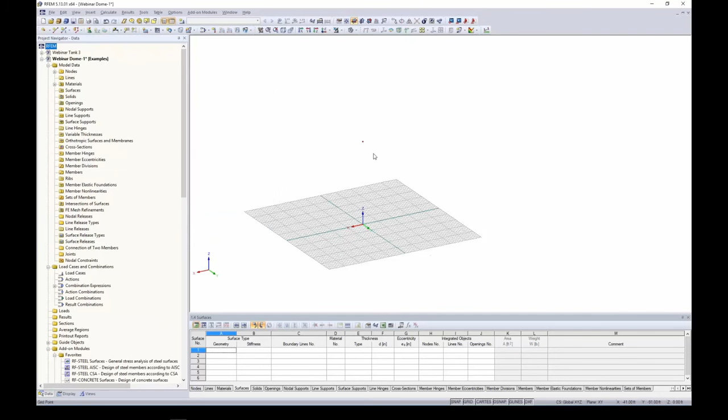So I'm going to move on to a line element. Now a line element is exactly what you would think it'd be, something similar to what you would use in AutoCAD. In addition to a straight line, we have many other features here that are similar to AutoCAD, such as circles, ellipses, polylines, arcs. For today we're going to utilize this option in arc where we define our radius.

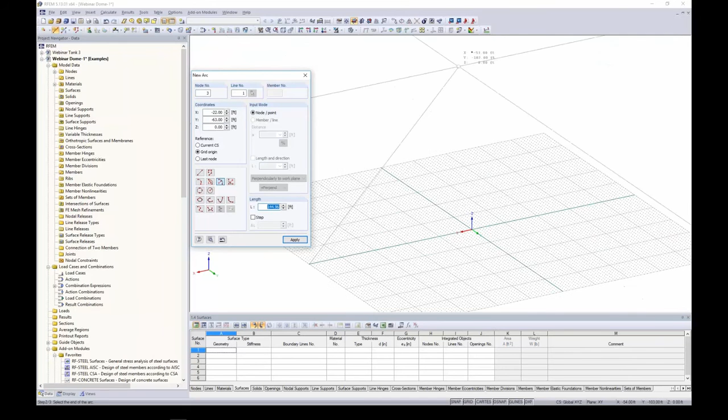So with this, I'm going to zoom in here, and I'm going to click on my first point 50 feet away from the origin and snap to that second node that we just created. So now you can see here that I can go ahead and either snap to a point to define the radius of my arc, or just type in 50 feet, hit enter, and now we have that arc element created.

I'm going to select this arc, and I'm going to use my rotate copy tool. I'm going to create 4 copies here with an angle of 90 degrees. Now we're going to rotate it about the origin, nothing too special here. But there is a setting called Edit Expanded Settings, and we have the option within this dialog box to actually create surfaces between my copy nodes. So what happens with this checked? Well, once I click OK through all of these dialog boxes, you'll notice that my dome roof was created with just a few clicks of a button.

So the dome roof right now is bright red. That usually tells you that there's something that hasn't been defined within the model. So when I highlight all of my surface elements, I double click to edit them. We want to set the material, the thickness, and the stiffness here. Right now everything's set to null. So we're going to change this to standard. We're going to utilize one of the default materials within the program, so concrete 4000 PSI. Now you can always access your material library here to change the material or to create one yourself. The thickness of our dome walls will be 8 inches, and I click OK.

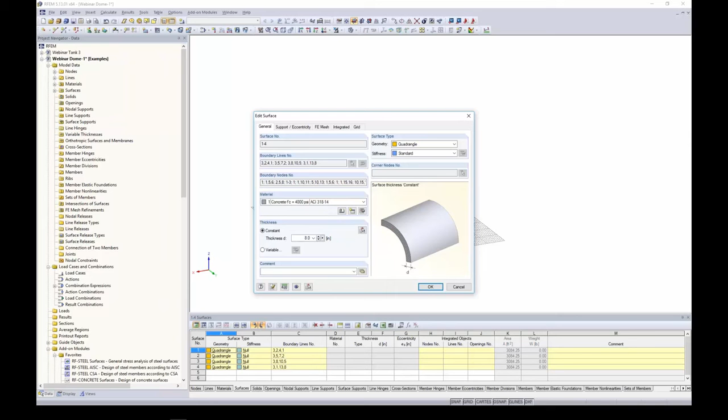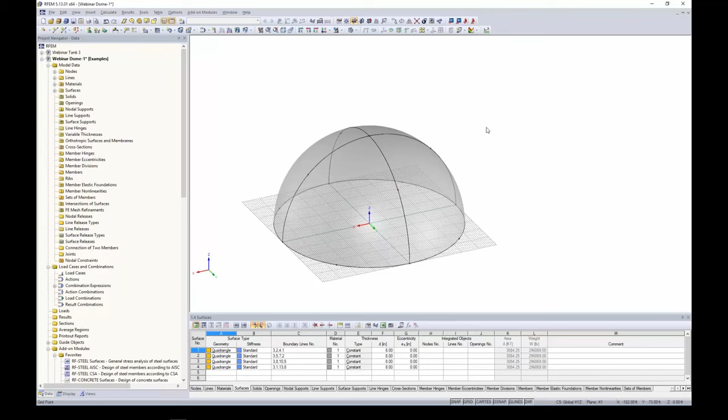So once I click out of here, you'll notice that the color is now gray, which is representative of our concrete material. So perhaps a weak point of a dome would be up here at the top, and we would want to add in some type of rib members for additional stiffness up at the top center point here. So I want to show you some of the useful features and tools that we have within RFEM to quickly do this. Now I'm going to turn this into a wireframe view, turn off my grid down at the bottom, and my line elements up at the top, I'm going to use my selection box here.

I'm going to right click to edit the line. And under this option, we have Create Node on Line at a certain distance. So with this option, I can create a node on that line 10 feet from the line end. And you'll notice these black arrows within RFEM show me exactly where the line start and the line end is. I click OK, so now I've done nothing more but just create little nodes here at the top of the dome. Now we're going to do the same thing at the bottom lines. I'm going to highlight all of these lines down at the bottom. Right click, and under line we can create a node on the line at a certain distance, again 10 feet from the line end.

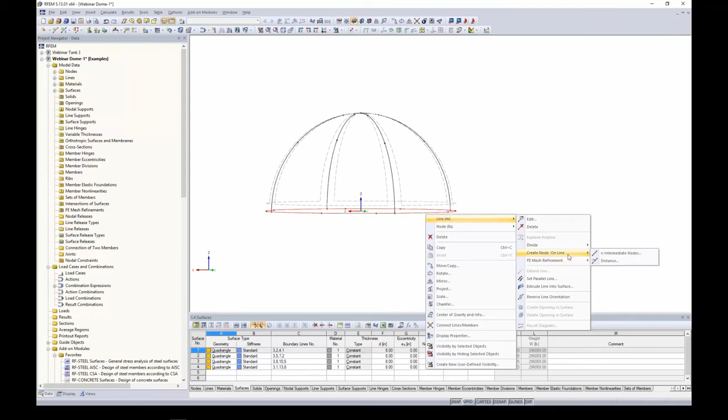I do the same process again. This time I'm going to create the node on the line 10 feet from the line start. Okay, so all I've done here is add in these additional nodes to my structure.

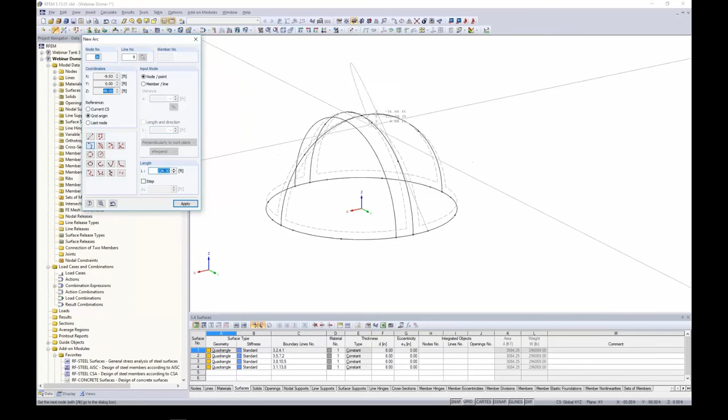Now I'm going to utilize the line element again. This time with my arc, I'm going to choose the option to define the arc with 3 nodes. Once I select this option, I can move this dialog box over and snap to these nodes that I just generated. Now you'll notice that I'm getting arc elements that match the curvature of my dome roof perfectly. There aren't any additional definitions that I need to define here in terms of the geometry, but the program will automatically do it for us.

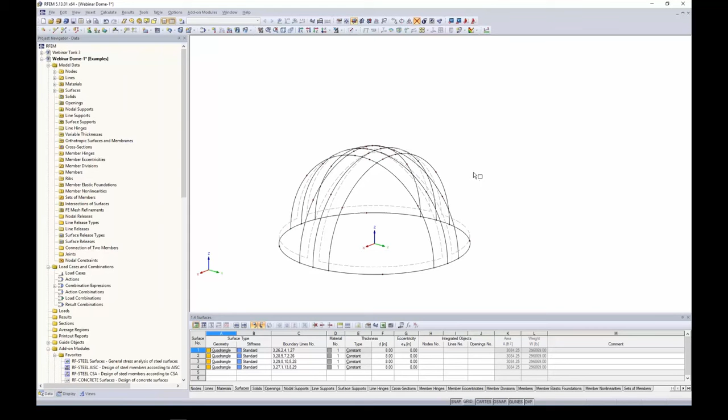Once I have done that, I am going to use this tool up here at the top, Connect Lines or Members. What this allows me to do is highlight the top of my structure here, and now all lines that are intersecting will be divided. You'll notice that an additional node was created here at these intersections, so these are now separate line elements.

I'm going to select 2 of the arcs over here, 2 on the back side, and right click to reverse the line orientation. Now you'll notice when I select the other 4 arc lines that all 4 of these lines begin at the bottom of my dome structure and end at the top.

With this option, I'm going to right click and divide the line this time by a certain distance. So from the line end, I'm going to divide it at 10 feet. I click enter, and now you'll notice I have a couple smaller line segments here.

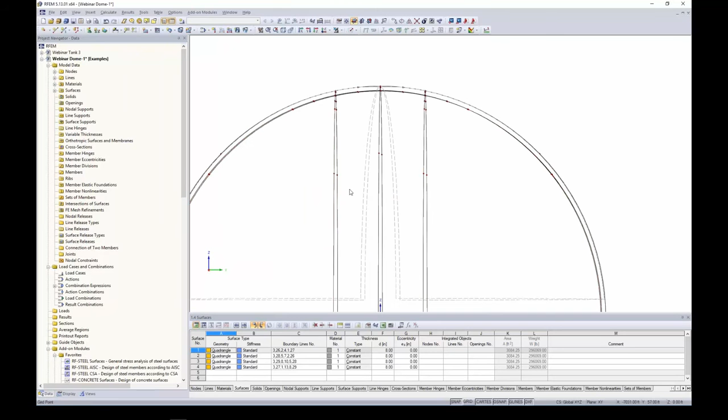Well, now we're ready to clean up the model a bit. So what I can do is turn this into elevation view, highlight some of these unnecessary lines, and simply hit delete on my keyboard. We're going to do so on the other side after I've rotated the structure around. Now you can see we have these what will be rib members, but right now they're only lines.

Now, before assigning a cross-section to these lines, what I need to do is integrate these lines into each surface. When I take a look at the rendered view, typically RFEM will do a lot of this for us automatically, but this geometry is a little bit more complex, and we added these lines in after the fact.

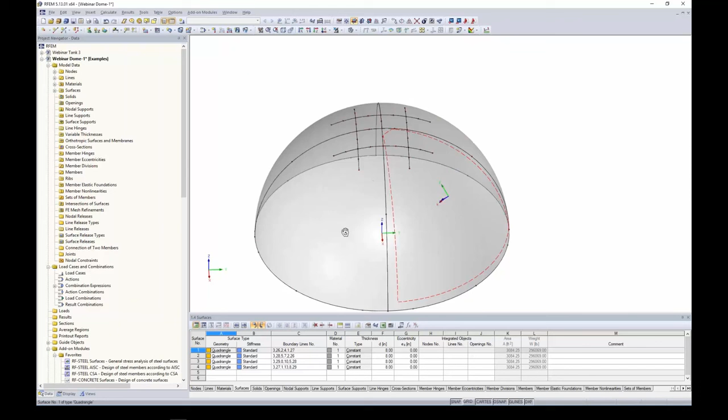So what I can do is double-click on this surface, and we have a nice tab here called Integrated. With Integrated, I can graphically select the lines, move this dialog box here, that I would like to integrate into that particular surface. I click OK, and then rotate around to do the same thing for my second surface, select my 4 lines graphically, click OK. We're going to do the same thing for the third surface, selecting the 4 lines, and lastly we have our 4th surface to consider. Once we fully integrate these lines in here, the surface will recognize that these lines are fully part of this particular 2D element, and I click OK.

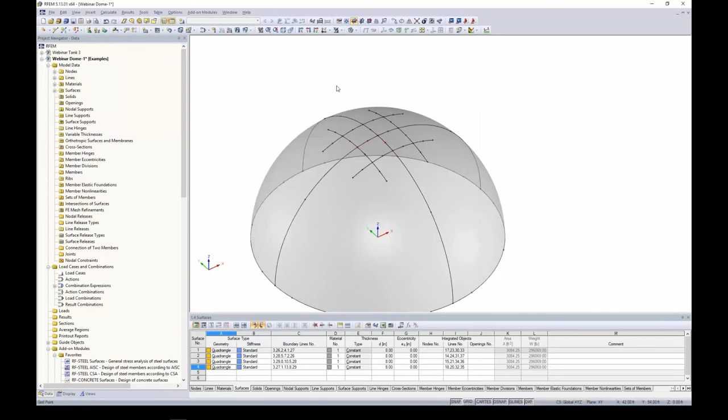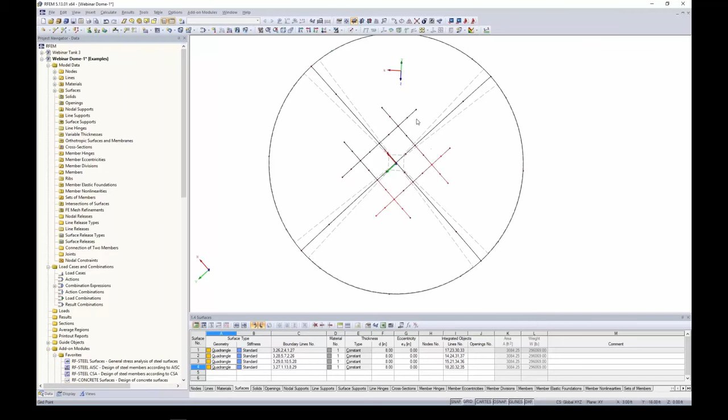So turning this back into wireframe view, I'm going to zoom out and put this into plan view. I'm going to hold down my control key and select all of these line elements here. I'm going to go ahead and click on - oops, sorry, I lost that selection. Let's try that again. So I'm going to select these 4 line elements on each surface that we just integrated, and I'm going to right click on these lines to edit them.

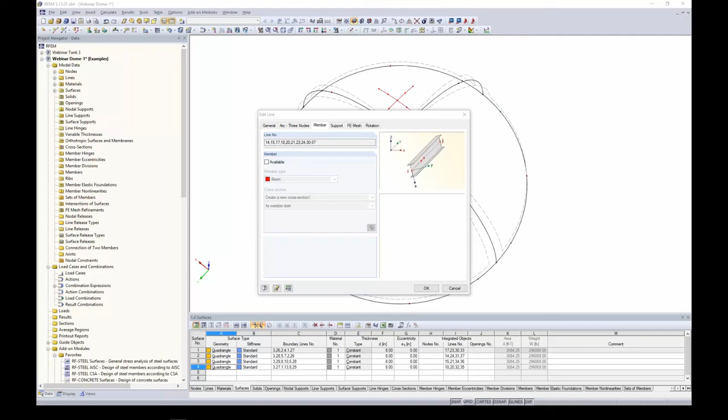Now each member, such as a column, a beam, anything else, is comprised of a line element underneath it. All that we've done is assigned a cross section to create that member for each line. So we have a member tab here. With this member tab, we can simply select that a cross section is available, and automatically a new member dialog box will pop up. Now the member type is going to be the type rib. So what is so special about a rib element?

Well, if I go into the detail settings here, you'll notice that a rib element can actually be placed below the surface. So the program will automatically determine which rib element should be dropped down below the thickness of that surface and do everything automatically.

We can define an effective width for the rib member on either the left or the right side. That will be taken into account later if we want to do reinforcement design for this rib in one of our add-on modules.

I click OK, and I need to assign a cross-section. For this, I go into my cross-section library. We're focusing on concrete today, so here are all of my parametric massive sections. We'll utilize this rectangle, and I simply type in my geometric properties of 10 inches by 18 inches. F'c of 4000 is great, we'll stick with that.

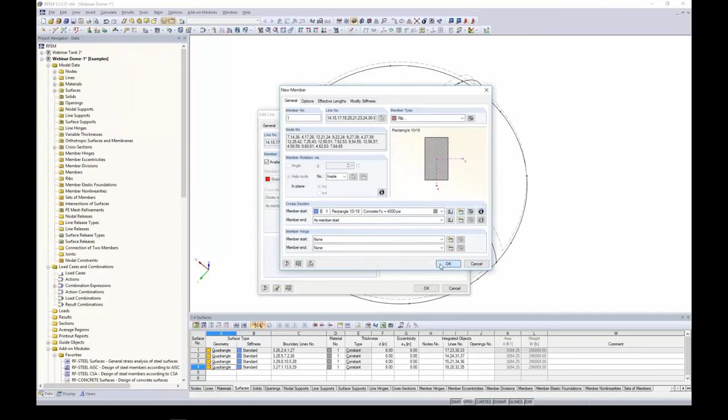In wireframe view, it doesn't look like anything happens, but if we turn this into a rendered view, now we can see these curved beam elements drop below the thickness of the surface, and everything was done automatically. Very powerful modeling features here in order to model those rib members.

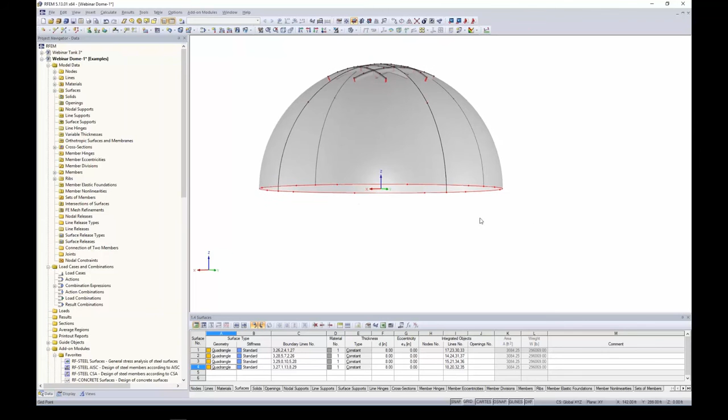So we're complete with the dome roof, and we want to move on to the lower wall. For this, all I need to do is highlight my line elements at the bottom. It's as easy as right-clicking on the line, extruding the line into a surface.

I'm going to specify a wall height of 15 feet. The thickness of the wall is going to be 10 inches. In the global Z direction, I extrude these surfaces and then assign my material to it. I click apply, and as easy as that, our walls are now modeled.

Moving on to supporting the structure. For this, we have nodal supports, line supports, and surface supports. For the bottom of our walls, we want to apply a line support. We have a couple default options here, either hinged or rigid.

We can always create our new definition, which has 6 degrees of freedom, both translation and rotation. We have partial fixity, so if you have something that's not fully fixed, not fully released, but somewhere in between, you can specify a spring constant here.

Because RFEM is a nonlinear analysis program, we can take into account geometric nonlinearities with these wall supports, such as sliding, friction, partial activity, maybe we have a failure. All of that is possible within the program.

As for today, we will stick with the default of fully rigid. I click OK, and I simply highlight the bottom line elements of my walls. This fully fixed support would be applied at every FE mesh point at the bottom of the wall.

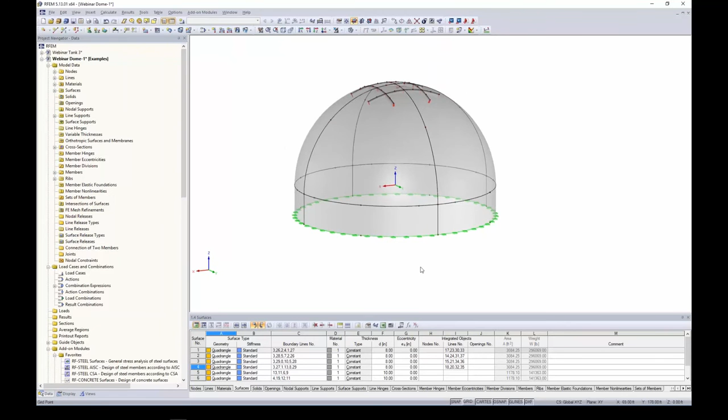If we right-click to turn on the local axis system, you'll notice that my local axes are not all in the same direction, and this is a problem for two reasons. Number one, for loading considerations.

If we were to apply loads according to the local axes, which we will do in just a minute, this can be a problem when trying to apply that load to multiple surfaces at once. The other, more important problem is our results, which will not be displayed graphically correctly if we do not orient these axes all in the same direction.

Our results are going to be based on our local axes. I'll mention this again when we get to it, but the point is that all of these local axes need to be facing in the same direction.

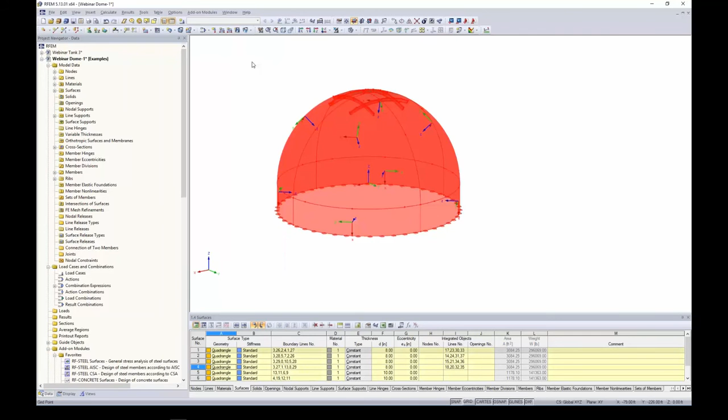We have a nice feature within the program: all I need to do is highlight this entire model, right-click to edit my surface, and we have a tab called Axes here. This allows me to orient all of my axes at one time. What I'd like to do before doing this is take a look at the model.

Now this line here, I'm going to right-click and reverse the line orientation, so it's starting from the bottom and going up to the top.

So now when I right-click to change the axes, I'm going to orient all of my local y-axes parallel to a line in the model, and I choose that line, the one I just reversed the orientation of. I click OK, and now you'll notice that all of my y-axes are facing in the vertical direction.

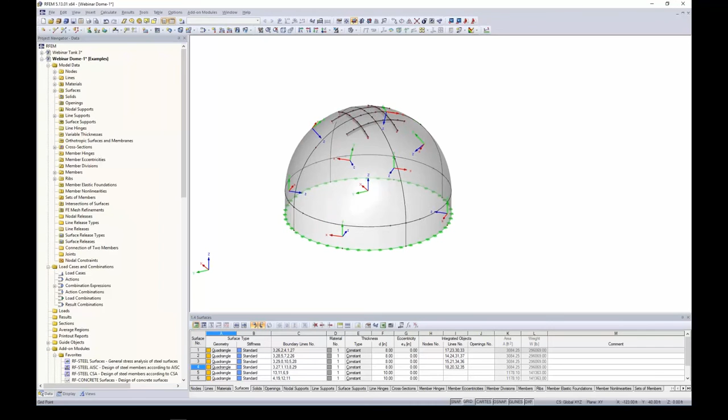Even the ones with curvature in our dome roof are facing directly toward the internal center point. That's one quick way we can orient all those axes, which is incredibly important. So let's turn off the local axis system and move on to crack factors.

The ACI specifies that we must apply crack factors to different components in order to modify the stiffness for our analysis, to account for cracking considerations.

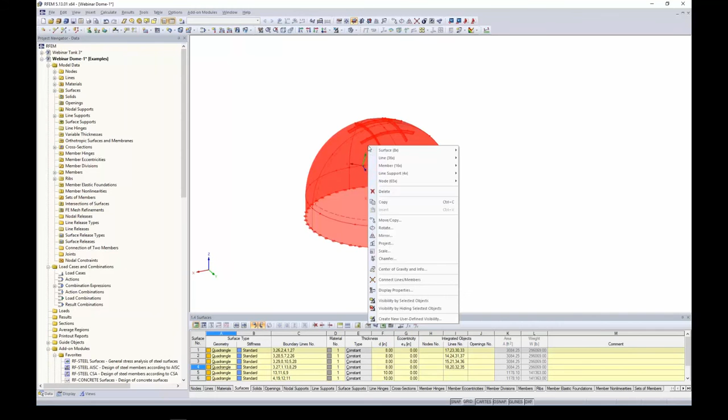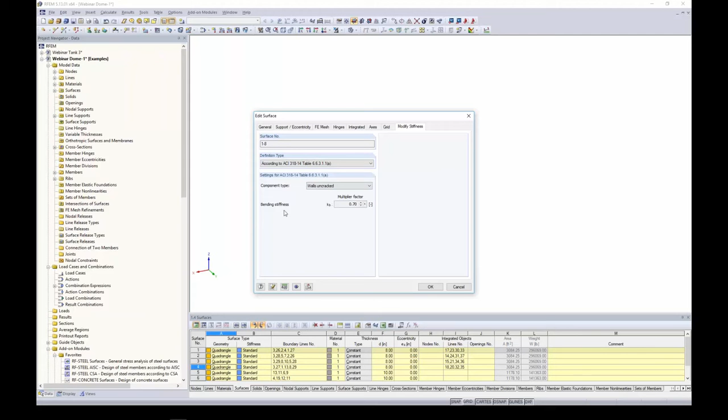We can highlight the entire model, right click, and under surface we have Edit, which has a Modify Stiffness tab. The default is always set to none, but using this dropdown, we have both ACI and CSA options. Looking at ACI, we have different component types: columns, walls, beams, flat plates, and flat slabs. If I choose walls uncracked, this is the crack factor directly from the ACI code, the reference applied to this stiffness when we run our analysis.

I can click OK to modify the stiffness. Don't forget we have these rib members at the top that need the same treatment. Right-clicking to edit the member, we also have a Modify Stiffness tab, and we set the definition type according to ACI. This time we choose beams, and here's the crack factor applied to the stiffness for my analysis. I click OK.

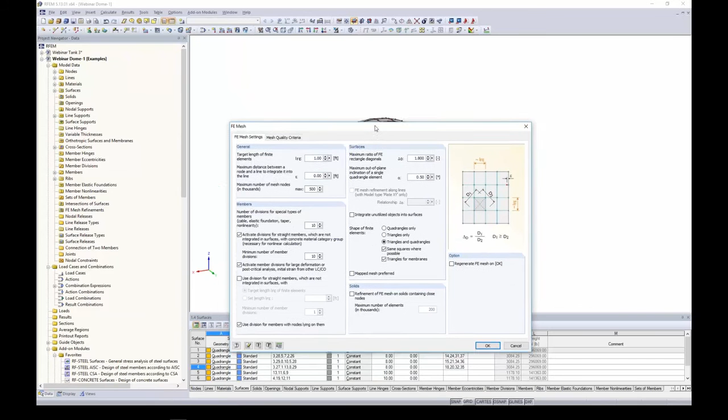The final consideration is our FE mesh. Under Calculate, Generate, or FE Mesh Settings, these settings are set to 1 foot by default. One foot is typically okay, but for a model this size, remember our diameter is 100 feet, so maybe we could go with something a little bigger. This is a happy medium that you have to find as the user.

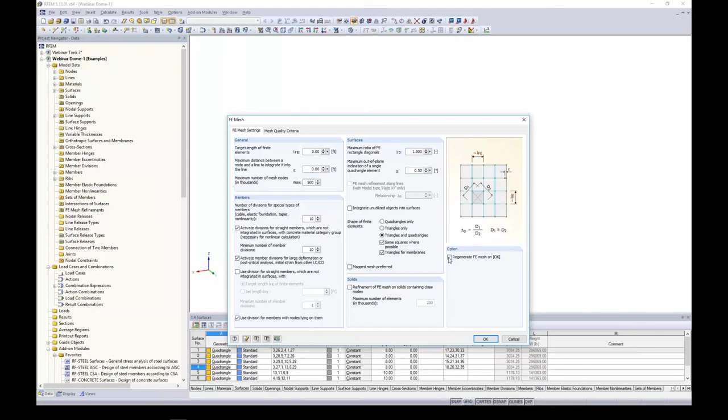If you set something too large for the FE mesh, you'll get inaccurate results. Set something too small, and your results will certainly be accurate, but it may take quite a while to solve your model. For us today, 3 feet is okay, and I can regenerate the FE mesh upon clicking OK. Now you'll notice the FE mesh is generated with the click of a button, everything tied into the nodes, the lines, the members, the supports. I don't have to do anything manually.

We can even put in FE mesh refinements if we'd like to. You don't even have to generate the FE mesh manually - this will automatically be done every time we go to run an analysis, but I just wanted to show you what that FE mesh may look like.

Okay, we are now ready to move on to loading. I'm going to generate new load cases using this tool in the toolbar, which opens our dialog box. For our first load case, we'll call this one dead, and assign the action category of dead. Action categories are important so the program knows which load factors according to ASCE 7 to apply to which load cases. For dead load, self-weight is automatically checked, so we account for self-weight automatically.

Creating a second load case, we'll call this one live 1, with action category live. We can make a copy of this one and rename it live 2. Creating a fourth load case, snow, with action category snow, and lastly one for wind with action category wind. Keep in mind for all these additional load cases, self-weight is unchecked - we don't want to account for it twice, so it's only active in the dead load.

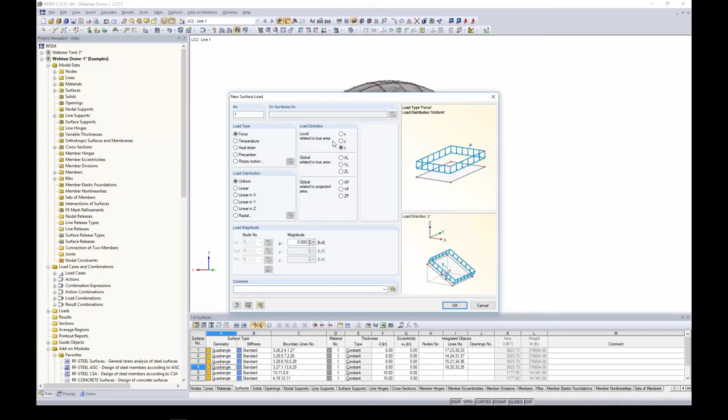So when I go to generate my new surface load, I am going to apply this in the local Z direction. Again, this is why local axes are very important to make sure they are all aligning. We're going to vary this linear in the Z direction. Now at the top of my wall, I want to have a magnitude of -2 kips per square foot. But at the bottom, I'd like to have -2.5 kips per square foot.

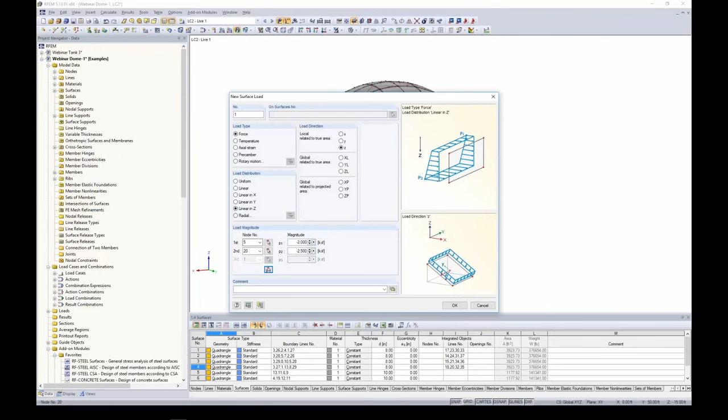So that's great. I've defined these two magnitudes, but I need to tell the program what is the top and what is the bottom of the wall. So I can graphically select 2 points. Here's the top of the wall, here's the bottom of the wall. So now those nodes are associated with those particular magnitudes. I click OK, and now you'll see that all I need to do is to select the bottom of my walls, and now that outward pressure is displayed. It has increasing magnitude as we increase in the depth of our wall.

For live load 2, same concept, but this time I would like it to be some type of friction load, only applied to the walls. So for this, we're going to go back to our surface load. This time we're going to apply it in the global Z direction. Now you could apply it in the local Y direction as well. It doesn't matter.

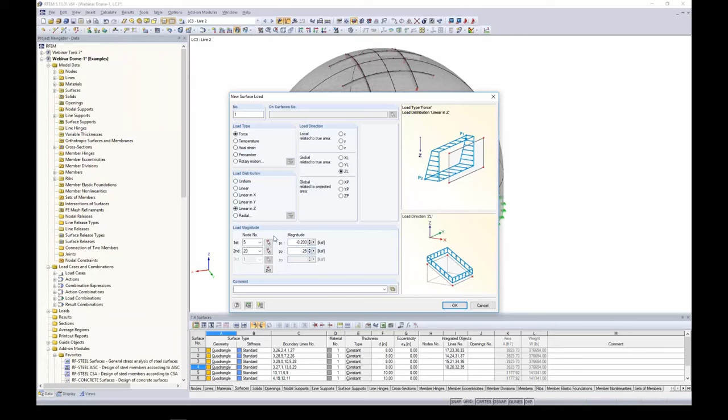This will vary linearly in the Z direction. The magnitude, though, will be -0.2 to -0.25, so much less. The settings are remembered from last time for what's the top of the wall versus what's the bottom. I click OK, and now you'll notice I just select my walls here, and here is my friction load applied to them. For snow load, even simpler.

I'm going to go back to my surface load once more. This time I'm going to apply it in the projected Z direction. So what does this mean? Well, at a point way out here on our dome roof, we're probably going to have very little snow load, if any. But at a point right here in the center where it's relatively flat, well, we want to see the full snow load. So with the projected load, it can take into account the different angles here of our dome roof.

I'm going to change this to a uniform load, and the magnitude will be -0.03 kips per square foot. I click OK. I highlight the top of my dome surfaces, and there is my snow load applied.

Moving on to wind load, and by far our most interesting load case. I am going to jump back to the PowerPoint for this to discuss a little bit about ASCE 7-16 wind loads on domes. So within the standard, there is Table 29.1-2. These are steps to determine the wind loads according to the main wind force resisting system for circular bins, silos, and tanks. This is incredibly user-friendly.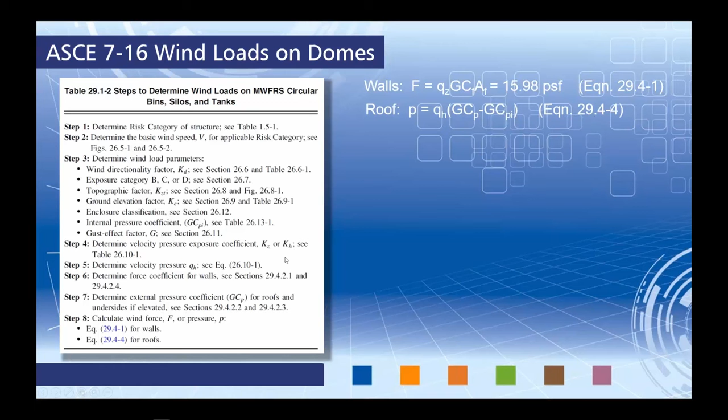The dome roof is a little bit more complicated. Again, this is referencing equation 29.4-4 from step 8 here. And this in turn references us to figure 27.3-2 for dome roofs. Now this is actually adopted from the Eurocode and was only available within the ASCE 7 within the last couple of releases. So for dome roof loads, we need to first consider the wind direction, of course, and then we have some various points here where our magnitude will vary. We have points A, B, and C.

Now, the external pressure coefficients, the code allows us to interpolate, and all of these interpolations are based on the geometry of our dome. For example, the roof height, the wall height, the diameter, which we'll find the appropriate values here within this figure, and you can see my colored lines where I have interpolated based on our dome today. Now, eventually we get two load cases for A, B, and C pressure, as I mentioned, on the dome roof. And we get a second case for A, B, and C too, with slightly different pressures.

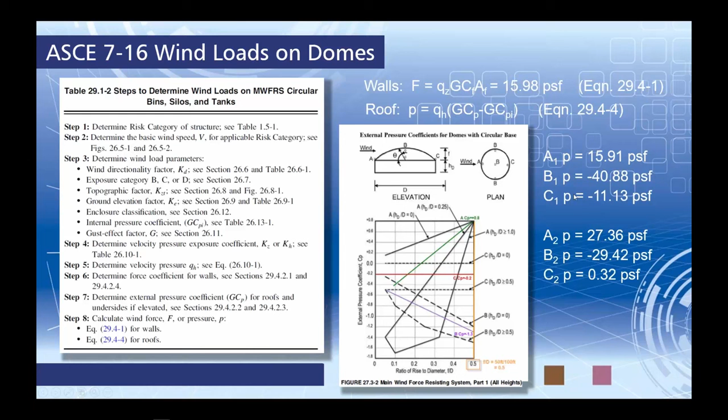Now, of course, we'd want to go through and maybe consider a different wind direction. If you have an asymmetrical structure, maybe we need to consider some torsional effects and so on. Again, for the sake of time, I'm only going to focus on this first case here and how we can apply it within RFEM. So jumping back to the model, the first thing we would like to focus on is the wind loads on the walls. I'm going to turn back on my drawing grid to assist me here, and I'm going to adjust the origin of the grid utilizing this button up here in my toolbar to move that to the front of the structure.

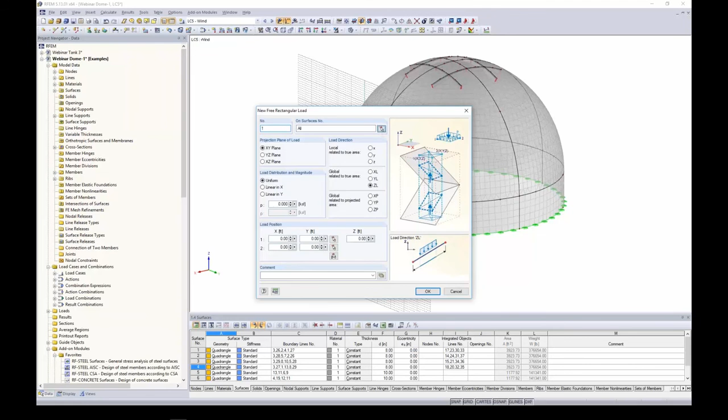So now, taking a look at the wind loads on the walls, I want to apply a free rectangular load. Now, a free rectangular load allows me to define a rectangular area, and all surfaces that fall within this rectangular area, well, this load will be applied to it. So you can see it's projected through that rectangular area to all surfaces within that box. So the first thing I want to do is to select my surfaces that this should apply to. Well, this only applies to my walls to begin with. I click OK. I do want to apply it in the YZ plane here, and I want it to be a uniform load.

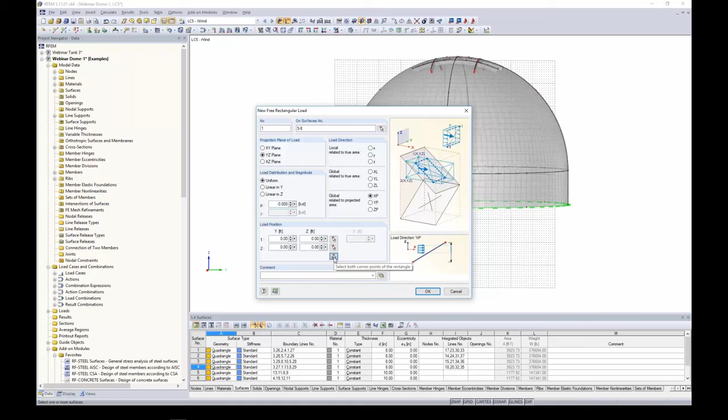What I'm going to do is I'm going to take that 16 PSF from the PowerPoint, I'm going to divide it in half. So 8 PSF on the front of the structure, 8 PSF on the back for a total force or pressure of 16 PSF. So negative 0.008 kips per square foot. And what I would like to do is apply it in the projected X direction. Now I need to define my load position. So for this, I just need to click 2 points here for my rectangle.

So what I'm going to do is I'm going to turn this into elevation view. I'm going to snap down to the bottom of my walls, negative 15 feet. And then as far as the second point, I'm going up to the top of the wall. And just like that, my points are automatically shown here within the program. So this will make a little bit more sense once I click OK. Now we take a look at these wind loads. It is in the projected X direction only being applied to these walls. Now once we run an analysis, we'll show you the load distribution on the structure, which will make even more sense. But for now, we'll move on to our roof.

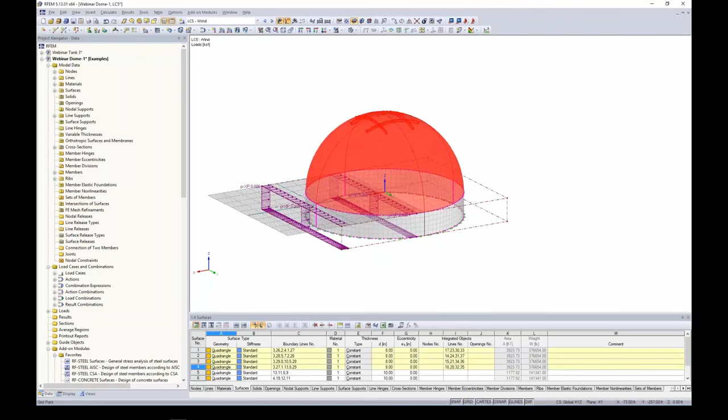So I'm going to select only my roof members here just to create an easier visibility by selected objects. And once again, I'm going to create a new free rectangular load. Now for this, I'm going to only apply this to the front 2 surfaces to begin with. I click OK. And the plane is going to be in the XY plane.

The direction is going to be in the local Z direction. Wind pressures are going to be applied normal to the surface here. It is going to vary linearly in the X direction. Now remember from the PowerPoint, at the front of the structure, point A, this should be 0.016, so 16 pounds per square foot. At the top of the structure, point B here, we want this to be negative 0.041.

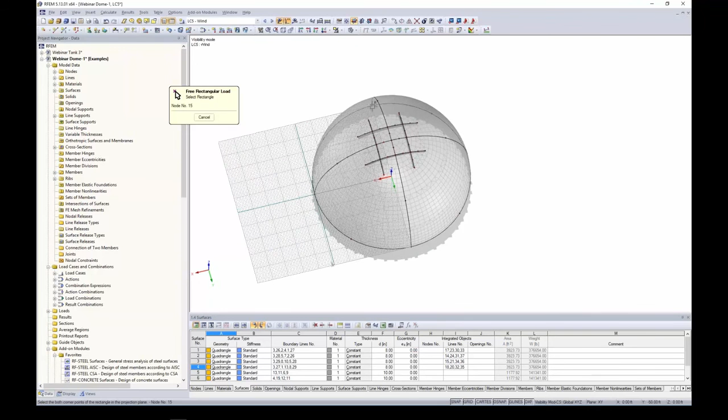This is suction load. So again, this was all taken from the ASCE7 calculations that I had done from the PowerPoint. I'm going to select my load position again. This time we select a rectangular section here that encompasses those front 2 surfaces. So I actually will change this to 50 feet. We can manually change it here as well.

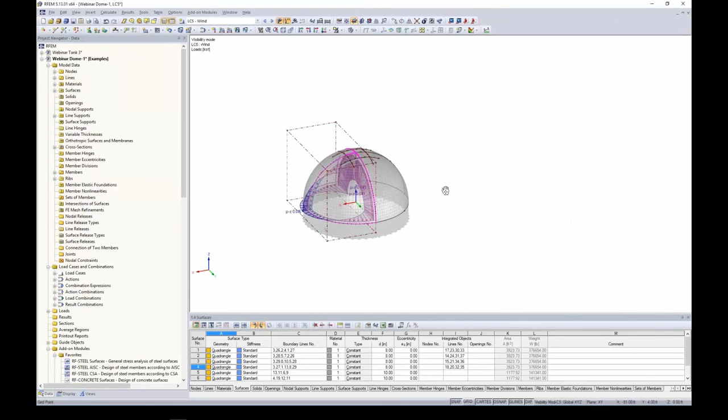I click OK. So now when I take a look at the pressures applied to the front 2 faces of my dome, here is my 16 PSF at the front. Here is my 41 PSF of suction up at the top, and it is displayed quite nicely. Now as for the back of the structure, same exact concept, and a really easy tool to use is to highlight this rectangular load. Well, if I can select it.

Okay, let's highlight this free rectangular load, and then I'm going to use my Move Copy tool. I'm going to create one copy, and I'm going to apply it in the negative 50 foot direction according to my global x-axis. Now I want to clear off the create surfaces between copied lines. So I click OK, and now that free rectangular load was applied to the back of the structure, but we need to make some modifications according to the pressure.

So let me go back to creating a visibility by selected objects. I'm going to double click on this free load in the back. Now this is not applying to surfaces in the front, but rather only the 2 surfaces within the back. So I graphically select them, and I want to adjust the magnitude here. That's the only thing I need to do.

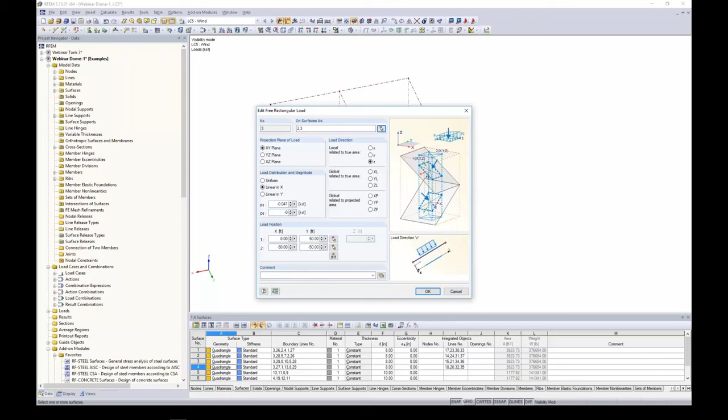So at the top, point B will be negative 0.041, and at the back side will be negative 0.011. And I click OK. So now my pressure is adjusted accordingly. Now this matches up perfectly to my points A, B, and C that I determined from the PowerPoint. So point being that we have so many features within RFEM that allow us to do these crazy wind loads on specialty structures, on not straightforward buildings, but rather curved domes and such, as you see here.

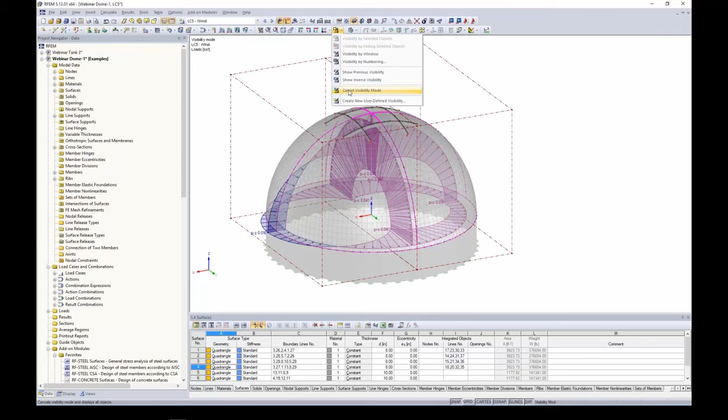Okay, so once we have completed all of our loading, maybe we want to scroll through some of these load combinations to take a look at all of them acting together. You'll notice here, for example, we have wind load, live load, snow load, dead load, all acting together. And now we're finally ready to run our calculation. So we can go to calculate, calculate all, and this does take a split second to run. So what I'm going to do is to go to an already saved model.

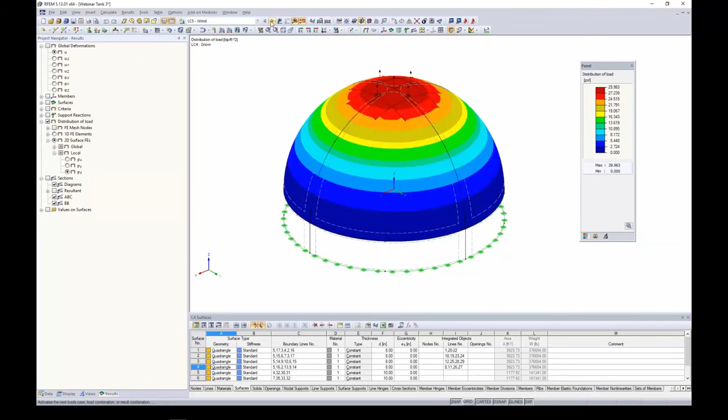And when we run our analysis, we're immediately presented with something that looks similar to this, showing us our global deformations. Now, here's the results available in our project navigator for the particular load case of snow. The thing I want to jump down to before getting into the analysis is the distribution of load. Now, in particular, I'm going to scroll to my wind load here, and I'm going to view it according to my 2D surface elements in the local Z direction. So creating a visibility only for my dome, I create that visibility.

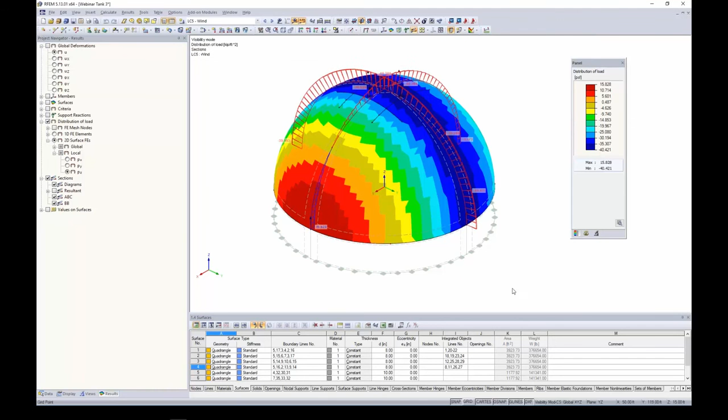Let's take a look at the distribution of the load. At the front, we have our 16 PSF. At the top, we have our 41 PSF, and at the back, we have approximately 11 PSF, of suction for both the top and the back. Again, this just comes directly from our PowerPoint. So I've also gone ahead and added in some sections here. And these sections, which I can turn on, just simply make a cut right through the center of our model.

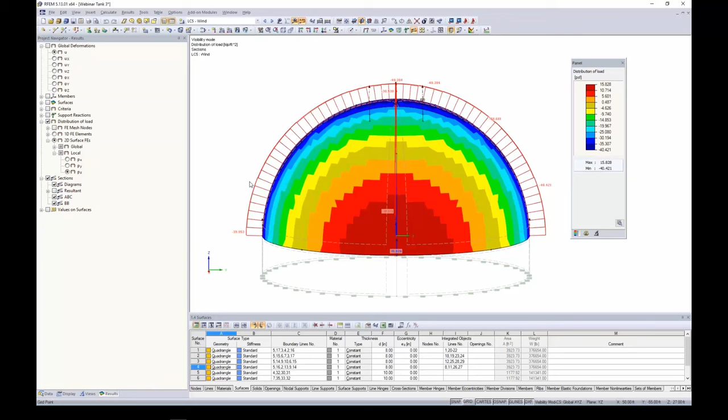So looking at our sections, we can see here that the 16 PSF, 40 or 41 approximately, and 11 PSF apply to the structure. Now when we rotate this to a point that is perpendicular to the wind load, we should see approximately the same magnitude everywhere. And that is what we see, approximately 40 pounds per square foot of suction. Now the same goes for any point perpendicular to the wind load.

So that is great for the distribution of load. Maybe we want to move on to the rest of the structure here. Well, what we're first going to be presented with is our deformations, and we can scroll through our various load cases and combinations. You'll notice that these sections are still applicable for any results that we're looking at, so that just makes that section cut view easier.

Now remember that we have our members up at the top too, so turning off my sections, we have these internal forces for our members, for axial loads, for example, shear forces, moments. So we can take these internal forces into our own tools, whatever we have in-house, if we wanted to do further reinforcement design. Now for today, we are focusing on our surfaces.

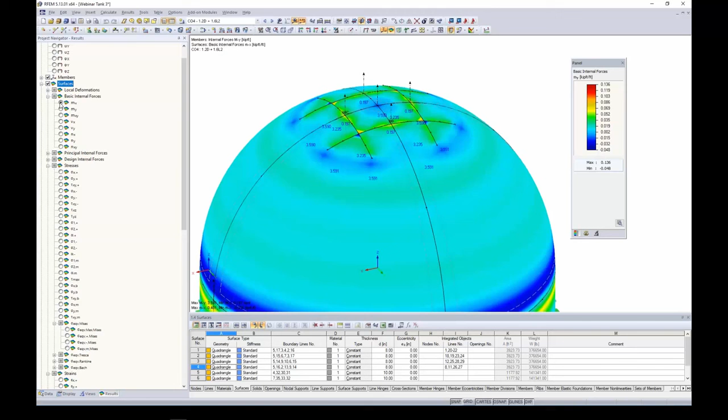So with our surfaces, you can see all of the information available here, such as MX, MY. Again, we can turn back on these sections here to view a cut through those. And keep in mind, like I said, these results are based on the surface's local axes. Again, that's why it is so important to make sure all of your surfaces are oriented in the same direction. We can view stresses, we can view strains, all graphically here.

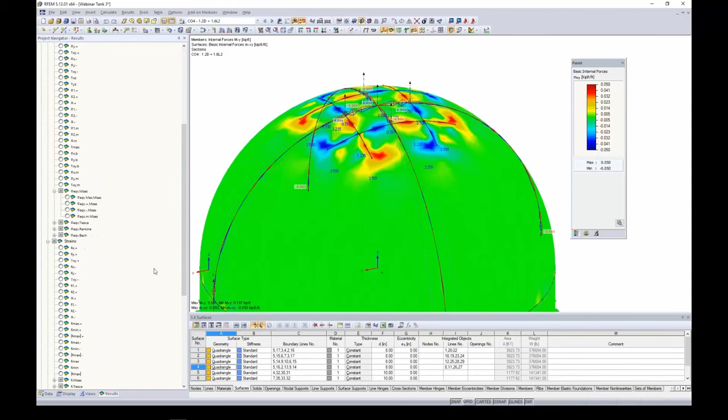So that's pretty much in summary what I wanted to show you that RFEM is comprised of for the analysis portion. Now for us today, we want to move on to design utilizing the add-on modules. So for this, I'm going to jump back to my other model here that we're working on, and I am going to launch RF-CONCRETE Surfaces. So the add-on module is nothing more than a dialog box. All of our loading, our load cases, combinations, materials, thicknesses, everything is brought in from RFEM into this add-on module.

The only thing I have to do is to specify some information that is relevant for design, reinforcement design, per the ACI. So you can see here we have both the ACI and the CSA available. We'll choose ACI for today. Now the strength limit state, I'm going to choose all of my LRFD load combinations selected for design. Serviceability, I am going to select all of my ASD load combinations selected for design.

Here is my first case. What we could do is go to File, Rename Case. We could call this one Strength and Service, just to be clear on what we're designing for here, and then I just simply move down my list. Materials are brought in from RFEM. For both concrete and reinforcing steel, it is set here as well. Now you can use this drop-down to make adjustments that you would like. You'll see the material properties are also listed here.

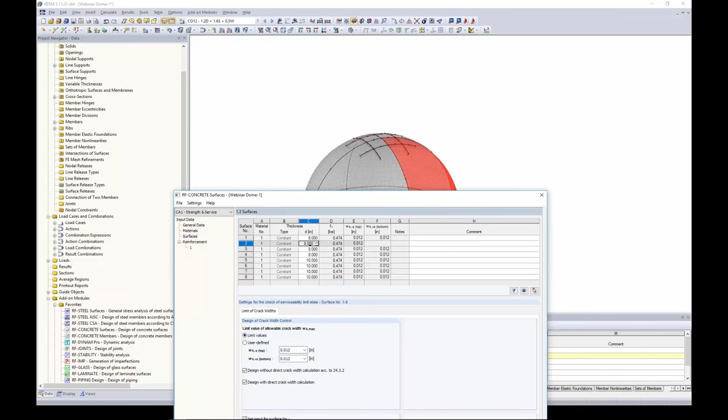Surfaces, again, all of the surfaces are listed. Now, everything is synced up to RFEM in the background. So as I'm clicking through these tables, you'll notice that it's highlighted in the background exactly which surface I'm looking at. Now, something to note for serviceability design, that we can design for crack width. So this option is only available because I had defined these serviceability load combinations.

And for crack widths, we want to first give the program a limiting value. So the first option here, limit values, has our drop-down box, which comes from the ACI committee. They gave us some allowable crack widths based on the exposure conditions of our structure. We will assume today that the structure is in a very humid environment, so our allowable crack width is 0.012 inches for both the top and the bottom. You can also use a user-defined option here to type that in manually.

We have two different checkboxes here, design without direct crack width calculation according to Chapter 24. Well, the ACI doesn't necessarily have limiting crack width values. What it does have is requirements for reinforcement spacing to make sure that we don't have any cracking issues. So with this checkbox checked, we will double check the spacing of the reinforcement to make sure we're meeting all of those minimums or maximums.

The other option is design according to direct crack width calculation. This will apply a theoretical calculation. It's the Gergely-Lutz equation. We will calculate a crack width based on the applied loads for our structure. Then we will compare that to the limiting value here to eventually get a serviceability design ratio.

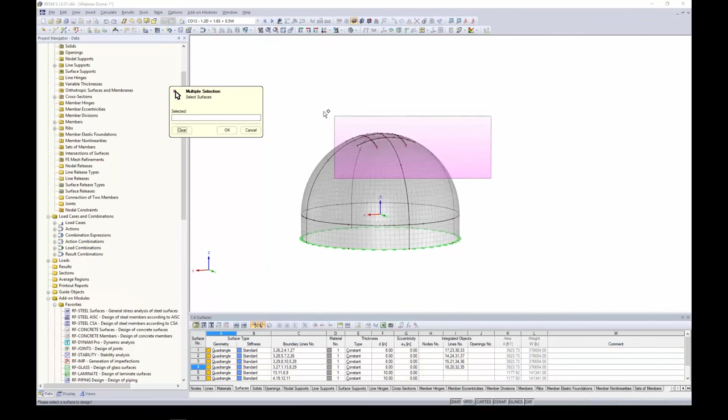I click OK, so it's surfaces 1 through 4. Now we have some reinforcement minimums here. You can change these as you see fit for your particular project, in particular maximum reinforcement percentage. This allows us to avoid brittle flexural behavior. The default is set at 9%, but you can adjust that as you see fit.

The reinforcement layout, this is where we define our concrete cover. It can either be measured from the centroid of reinforcement or to the edge of reinforcement. For today, I'm going to specify this as 2 inches in both directions for both my basic reinforcement and my additional reinforcement top and bottom.

The longitudinal reinforcement. So this is my provided basic reinforcement. For my dome, I'm going to make the assumption that number 6s at 12 is going to be perfectly adequate based on these applied loads. So what I'm going to do is utilize this nice tool that we have here. Assuming number 6s at 12 inches, my diameter is 0.75 inches, and my spacing is 12. So when I click OK after applying it to both the top and bottom and both directions, my reinforcement area is automatically calculated here along with my diameter.

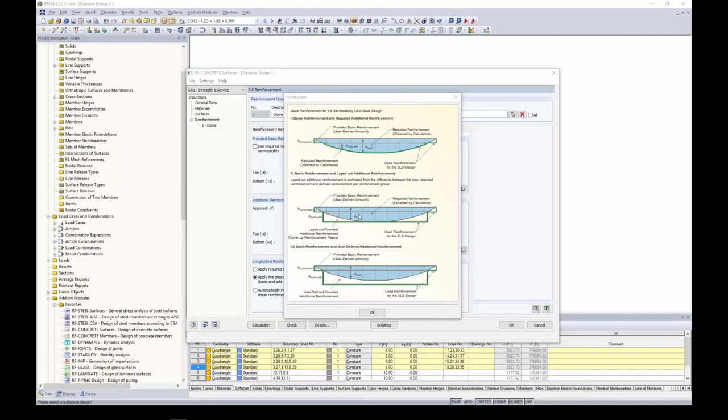This second option, additional reinforcement for serviceability state design, well, there's 3 options here. And the 3 options are laid out a little bit better in this little info button. With this info button, we can see that the first 2 options will increase my longitudinal reinforcement as the program sees required. Instead, I'm going to choose this third option down here. I don't want the program to automatically increase my reinforcement, but instead I want to define what additional reinforcement I should put in here. And for right now, I'm going to leave this as 0. Again, I'm assuming these number 6s at 12 inches are perfectly adequate.

So moving on to the ACI 318 tab, there are some minimum reinforcements here according to plates for Chapter 9. I'm going to uncheck this, and instead I'm going to use the minimum reinforcement for walls according to Chapter 11. We also have shear reinforcements, shear strengths that all come directly from the code. If you don't see these minimums as fit for your particular structure, maybe you're not following the ACI for these provisions, you can simply uncheck them. These strength reduction factors, for all of us who have done concrete design, we know that these come directly from the standard, Chapter 21. These default values do come from the ACI, but you can override them if you choose to do so.

Lastly, the design method. We have two options here, no optimization for our internal forces or optimization. The important part is just to read between the parentheses here. This is recommended for parts mostly loaded by pressure. This is recommended for parts by bending or tension. So we will leave this optimized for now. So essentially we are done with the reinforcement provisions for our domes.

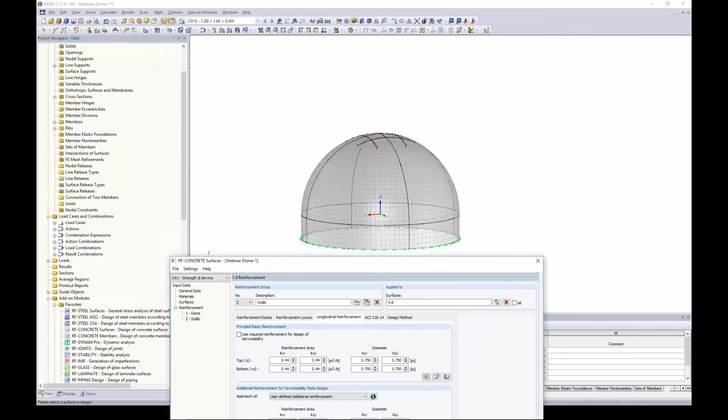Now what I would like to do is to simply make a copy of this reinforcement group. I make that copy and I call this one walls. So now you can see both reinforcement groups are available over on the left, or I can use my drop down available here. The program automatically assumes that surfaces 5 through 8 should be applied here. That's correct, but I can also graphically select them as well.

The only thing that I'd like to do different is instead of number 6s at 12, I know I need increased reinforcement here. So instead, I am going to choose number 7s at 8. My diameter for number 7s is 0.875 inches and my spacing is 8 inches applied to the top and bottom in both directions. I click OK and now you'll see that increased reinforcement area listed here. Absolutely everything else is unchanged from what I just set it to because I made a copy of that reinforcement group for my dome. So now we're ready to run our calculation.

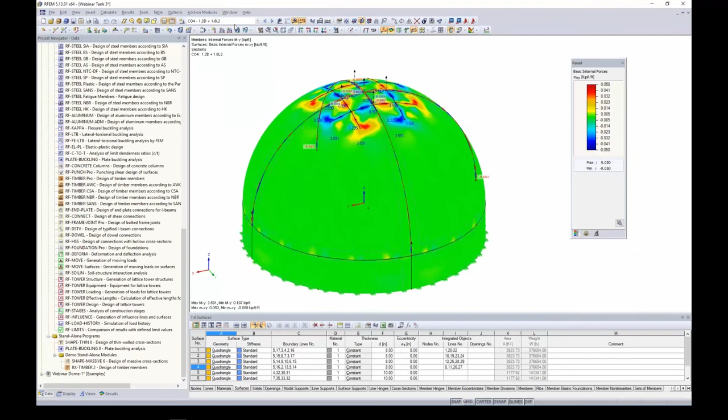Now, again, this takes just a couple minutes to run, so I'm going to jump to our already saved model. What you should see when you run a calculation is you will automatically jump to this table here. You'll see our results table available after you run that calculation. So the required reinforcement by surface. We will see in here 4 different columns. The required reinforcement is what the program has determined for all of our reinforcement directions, top, bottom, required by analysis. My basic reinforcement is what I put in there.

Remember my number 6s at 12 inches for my dome and my number 7s at 8 inches for my walls. Now there is an additional required reinforcement area. If I am seeing numbers here, that usually means there is a problem. My basic reinforcement that I just put in is less than my required reinforcement.

Now these tables are nice. Keep in mind that they are all synced up to the background within RFEM as we scroll through them, so you can see exactly where the controlling internal force is. But let's actually jump to the graphics view. So we're still technically in the add-on module, you can see this from the drop-down box in our panel, but we're viewing the results back in RFEM.

So what I want to show you is, number 1, the required reinforcement. This is what the program has determined that it needs based on the applied loads. Here are my 4 different longitudinal reinforcements. You can see here I have both top and bottom in one direction and top and bottom in the second direction. If we zoom in, we can see the reinforcement layout direction graphically displayed as well.

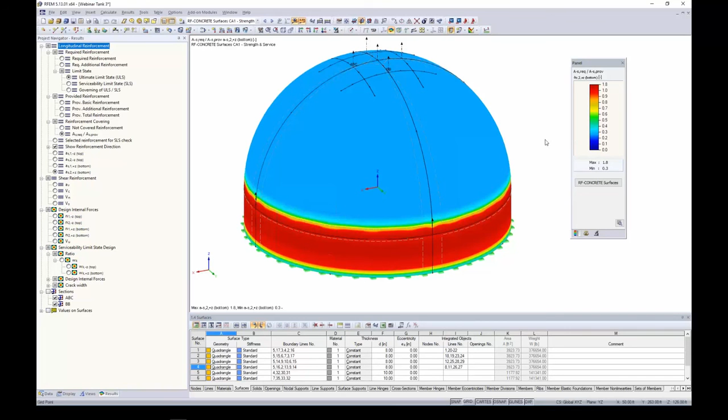So now the important part is to jump to this ratio, AS required over AS provided. Anything greater than 1.0 here is a problem. Again, this means that my required reinforcement is greater than what I have told the program to actually put in there. So you'll notice that for all of these different reinforcement directions, top and bottom, we have some ratios greater than 1.0.

Even more helpful is to view the not covered reinforcement. This is my AS required minus my AS provided. This is what I still need to put into the structure in order to pass the design requirements. So we can scroll through the different options here and you can see exactly where the problem areas are that I simply don't have enough reinforcement.

So what I went ahead and did is, back in the add-on module, I went to File, Copy Case. And when I copied the case, I created a different name for it. All of my settings were remembered from my first case. The only thing that I did was jump to my longitudinal reinforcement and I increased my area here.

For my dome, I'm now looking at number 7s at 8 inches. That's all I've done is increase the area. For my walls, I've increased the area to number 10s at 8 inches, so significantly more reinforcement.

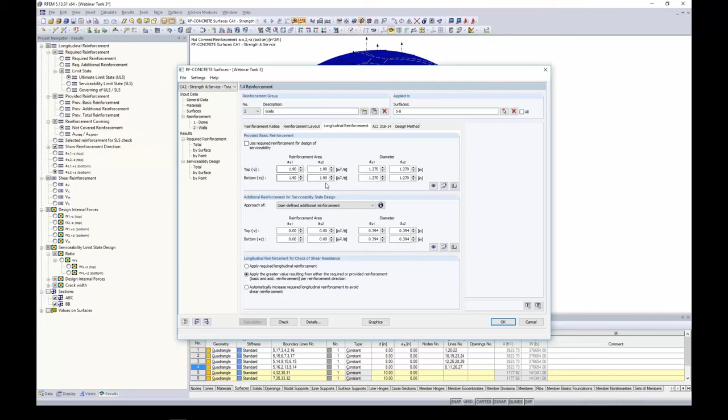Now, once I run my calculation, I'm immediately brought into my results table here. So now we can see that this additional required reinforcement, it's all 0. That tells me that the program has met the necessary reinforcement requirements just based on what I put in there. If I jump back to my graphics view, required reinforcement is still the same. Nothing has been altered here because I haven't adjusted any of my applied loads or the structure itself.

As far as the provided basic reinforcement, this is now increased. So when I look at my not covered reinforcement, this is any reinforcement that is still required, you'll notice that everything is zeroed out. That means that my provided reinforcement is adequate for this design. So that's how we can add the reinforcement to the surfaces individually.

What I would like to show you now is that ideally, especially for a structure this big or any structure in general, we're probably going to optimize the reinforcement, meaning we're going to put more reinforcement where it's needed and less where maybe we don't need as high of reinforcement. So how can we manually define where to put these different reinforcement areas?

Well, for this, I'm going to jump back to my webinar that I was currently working on, and we're going to launch the RF Concrete Surfaces module. I'm going to go to File, then New Case, or sorry, Copy Case. And this one we will call Strength and Service Manual because I'm going to manually apply those reinforcement areas. I click OK. So once again, nothing has changed here because I made a copy of that case. So really beneficial not having to re-enter in all that information.

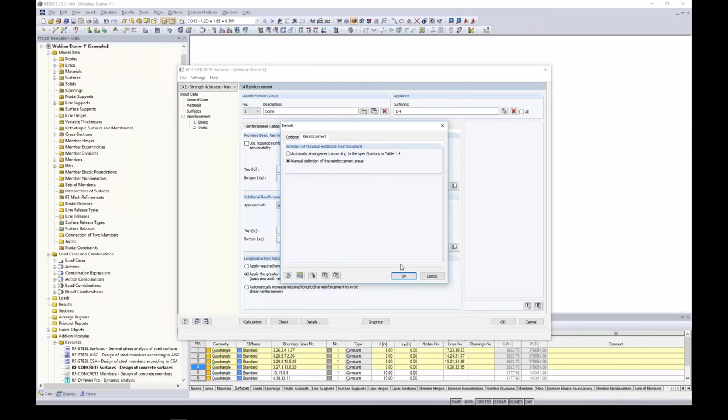I'm going to choose the option Manual Definition and click OK. Now you'll notice that this dialog box looks slightly different. This is the only part that is affected in the module by changing that to manual.

For my domes, I still have my reinforcement area for provided basic reinforcement. I'm going to open up my tool here, and for this particular reinforcement, I want number 10s, a diameter of 1.27, at 8 inches. I'll apply this to top, bottom, and both directions and click OK. You can see my total reinforcement area is shown here.

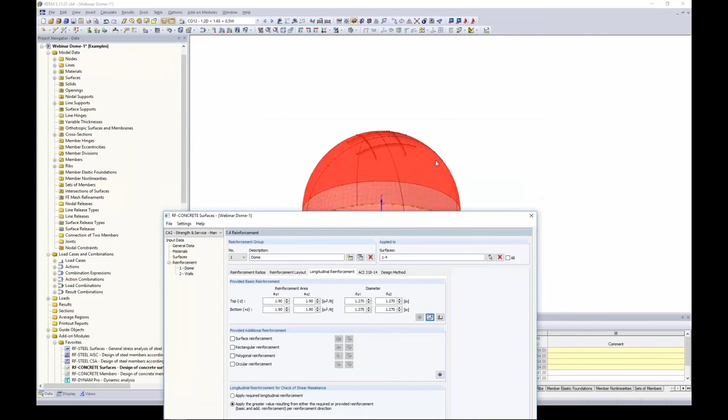I'm not going to do anything further with my dome. I'll assume I want these number 10s at 8 inches. Oh, actually, that's entirely too much reinforcement. Let's go back—we'd like to apply number 7s at 6 inches instead, a diameter of 0.875 and a spacing of 6 inches, top, bottom, and both directions.

Now we're looking at the reinforcement area given here. I'm assuming I want those number 7s at 6 inches everywhere within my dome roof, so we're not making any changes here.

Now for the walls, I do want to specify two different reinforcement areas. At the top of my wall I want a higher reinforcement; at the bottom I want a lower reinforcement since it's not needed there. So the first thing I'm going to do is zero out my provided reinforcement—we could put something here if we'd like, but for now I'm just going to zero this all out.

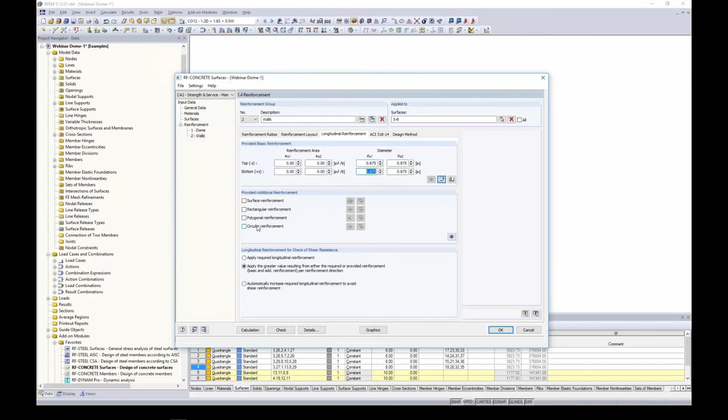The provided additional reinforcement can be placed in several different shapes. For example, we can apply additional reinforcement for a particular surface, for a rectangular area projected through several surfaces, a polygonal area—which is what we'll use today—or a circular reinforcement area. Circular might be beneficial for the top of our dome if we wanted a different reinforcement in a circular fashion. Really, any shape is possible.

Utilizing the polygonal reinforcement, I'd like to launch this dialog box. For this option, I want to apply this in the YZ plane, and you'll notice it's applied to surfaces 5 through 8, pulled directly from my walls. I can always adjust this if I'd like. I'm going to apply this as top, bottom, and my first direction.

The rebar for the top of my walls, I want this to be number 10s, 1.27 diameter, at 8 inches. Now this will typically be blank when you first pull up this dialog box, and I now need to define the reinforcement position.

This dialog box looks pretty similar to a rectangular freeload, same kind of concept here. I'm going to graphically choose now, and I'm going to turn back on my grid. I'll rotate the model and snap to the points in elevation view where I want these number 10s at 8 inches to apply.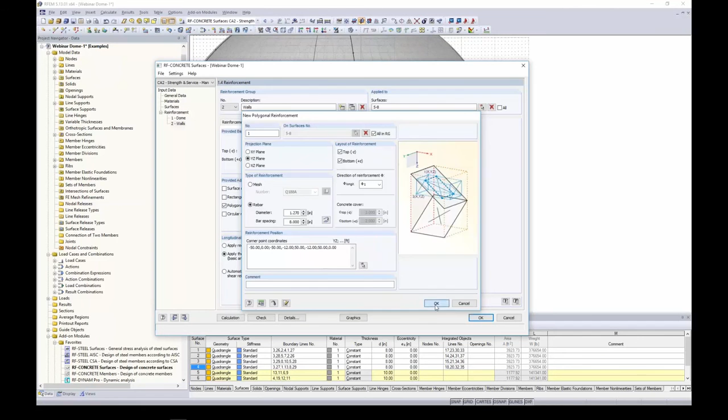I'm going to move to the top of the wall all the way down to a point about 3 feet from the bottom of the wall, then to the other side, a point 3 feet from the bottom up to the top of the wall. Once I click those 4 points, I right click to get back into this dialog box and click OK. Opening up this same dialog box, all of my settings are remembered.

The only thing I'm going to do is change a direction and click OK. Now when I take a look at this table, you'll notice I have my number 10s at 8 inches applied to both top and bottom, in both directions, at these particular nodes, projecting through my surfaces 5 through 8. So I click OK.

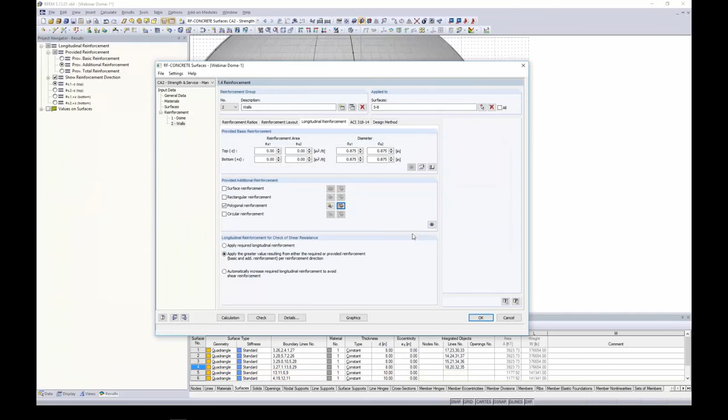Well, what about the bottom of the wall? This is where I want to come in—and again, most of these settings remain unchanged. I go back to my direction 1. I want to decrease to number 9s; maybe I don't need number 10s, but I want to decrease this to number 9s, choosing a diameter of 1.128 at 8 inches.

Now for this, I want to clear out this selection here, and I'm going to graphically choose the bottom 3 feet of my wall.

So what I can do is turn this into elevation view, snap to a point at the bottom, snap to a point 3 feet from the bottom, move over to the other side 3 feet from the bottom and down to the bottom of the wall. I right click and my points are automatically populated here.

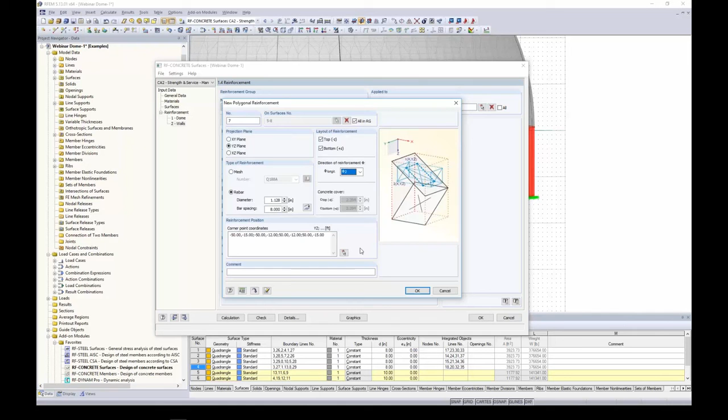Now I click OK. I open up that dialog box to change my reinforcement direction in the other direction here. I click OK, and now when I look at this table, I now have the bottom 3 feet of the wall with slightly less reinforcement.

Now this table is nice, but it might be beneficial to see this graphically of how it's applied to our surfaces, so that's what this little eyeball allows us to do here. When we click on this, we are brought directly into RFEM, still with this table being displayed here. Maybe I turn on my color panel here.

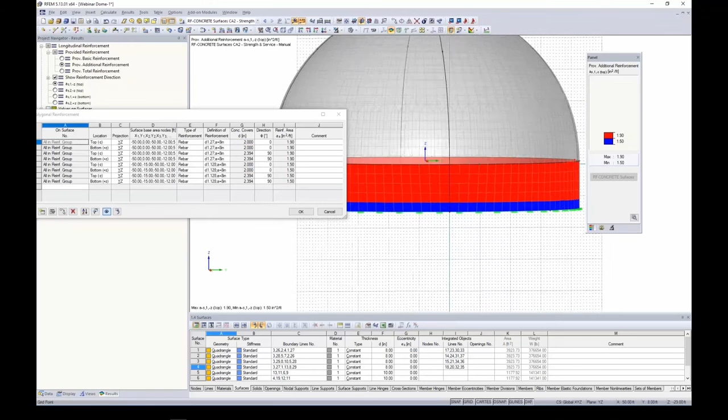Now I can see that for the top of my wall, 1.9 inches squared per foot is applied, but at the bottom, I only have 1.5 inches squared per foot. And the same goes for all the way around the structure. So pretty beneficial for viewing visually what we're applying.

So now that we are done with the reinforcement, I'm ready once again to run my calculation. So once again, jumping to my saved model, I would like to take a look at the results. So we are immediately brought into our required reinforcement here, and you'll notice that the required reinforcement is listed based on the analysis.

Again, nothing should be changed with that. The basic reinforcement is also listed as well as additional required reinforcement and so forth. But like I said, most beneficial is probably to jump to the graphics view.

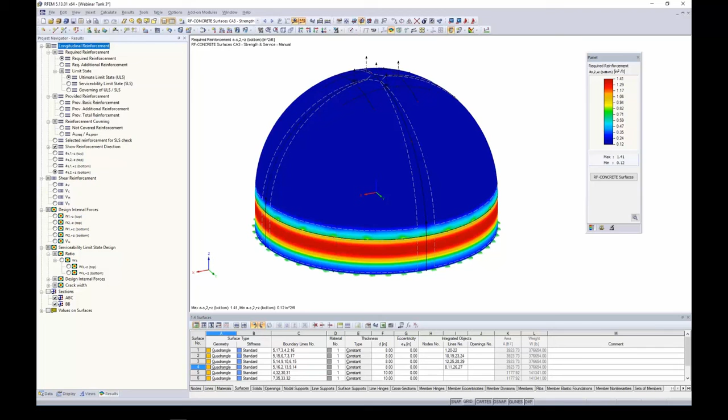So for the graphics view, we want to take a look at, again, required reinforcement did not change here. The provided basic reinforcement, remember I've only provided that for my dome surface elements here, 0.9 inches squared per foot. The walls are 0. Instead, for the walls, I defined that as provided additional reinforcement. Here's my 1.9 inches squared at the top of the wall and 1.5 inches squared at the bottom.

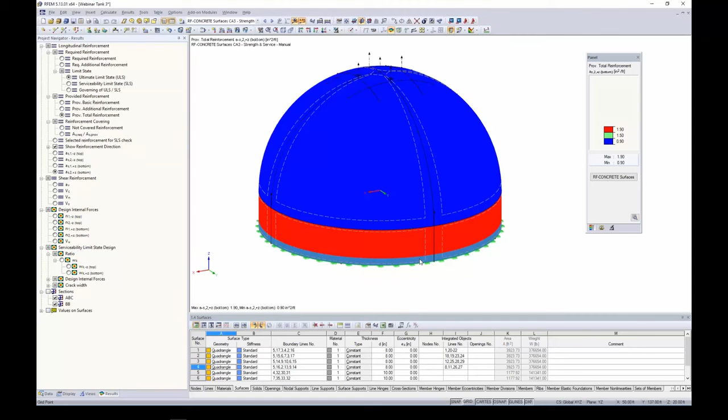We can view everything added together for provided reinforcement: 0.9 inches squared per foot, 1.9 inches squared per foot, and 1.5 inches squared per foot. Now when we take a look at our not covered reinforcement, it looks like everything is 0. So based on the applied reinforcement that I put into the program, we are meeting what the required reinforcement is.

One thing I also wanted to mention quickly is our serviceability design, which we haven't touched on yet. If we jump to the serviceability table, you'll notice here is my crack width, here's my existing value based on the applied loads, and here's my limiting value. Remember, we set this as 0.012, and ultimately we get a ratio for our serviceability design. The Gergely-Lutz equation is listed here, and all the information necessary for that.

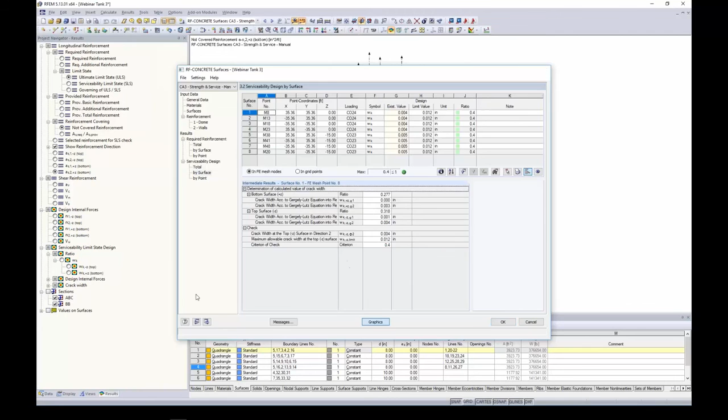We can also view our serviceability information graphically. For example, here's our serviceability tree. We can view the ratio for cracking back in RFEM.

So the last and final thing I want to touch on is deflection. Going back to our working model here, we want to take a look at the add-on module, RF concrete surfaces, and I'm once again going to go to File, Copy Case. We will call this one Deflection. I click OK. Now I've made a copy of this case, so everything has already been defined for my reinforcement. I don't need to adjust anything.

The only thing I want to show you is under serviceability limit state, we have two methods of check: analytical and nonlinear. Now nonlinear is for the module extension concrete nonlinear. We won't be getting into that today. But rather, when I go into the details here, we're already designing our serviceability for cracks, but we have another option here called deflection with RF concrete deflect.

Now again, this is a module extension. When I click this option, the program throws up a warning saying we're not going to adjust the required reinforcement based on deflection design or deformation checks. That's fine. Basically, all we're doing is checking the deflections but not adjusting any reinforcement.

Now, long-term deflection with considerations to creep and shrinkage can be considered here. This all just comes from the ACI, which requires creep and shrinkage to be considered for uncertainties in temperature, humidity, curing conditions, and so forth. We can put in here the duration of our load.

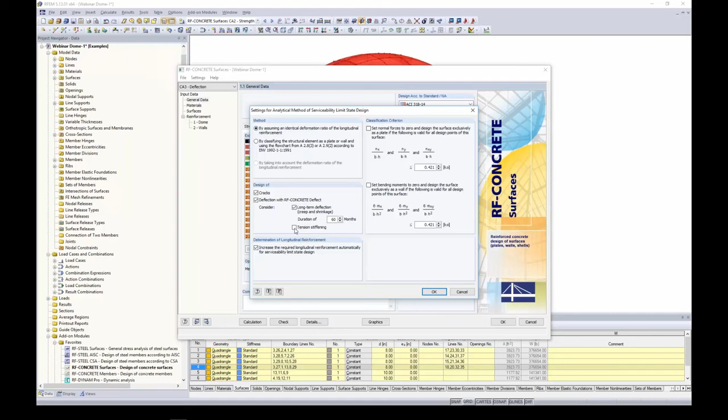Tension stiffening: with this checked, this is just telling us that the concrete, in addition to the reinforcement, will contribute to the resistance of the internal tension forces. If I were to uncheck this, we're assuming that only the reinforcement will contribute to the resistance of those tension forces. So we will leave this checked for today.

So I click OK. Now the only thing that's changed is under my Surfaces tab, we now have an additional tab here for deformation analysis. So we've already discussed crack widths, but right next to it is deformation analysis. Now we have some limiting deflection ratios here. So you can see here that we have either the minimum boundary line, the maximum boundary line, or we can select some type of user-defined relative distance. The default is L over 250, but you can override these as you see fit.

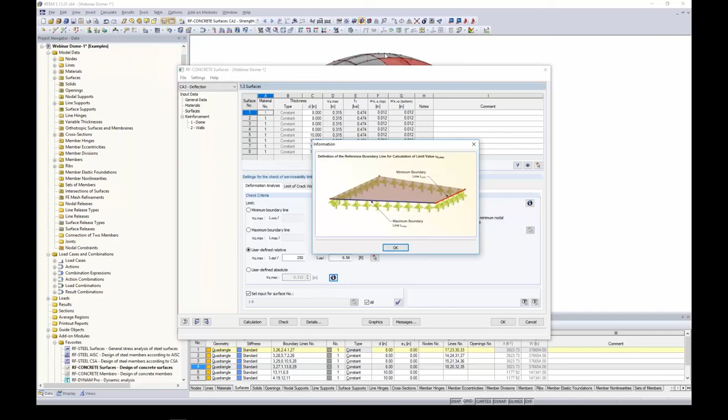Now, something that's useful is to launch this little info button. This tells you exactly what it means by minimum boundary line, maximum boundary line. Now, for today, we kind of have these odd surfaces, especially for our dome, where I broke apart some of the lines. So in my opinion, it's not ideal to use these today, but rather I'm just going to use this fourth option, and I'm going to say I want no deflection greater than 1 inch.

So the next question is to determine the deflection that we're checking. Is this based on the undeformed system or the deformed system? This is simply absolute versus relative deflection. So the undeformed system is going to be absolute. It's going to be measured from the undeformed structure to the deformed structure. The second option here is maybe explained a little bit better in this picture. You'll notice that the deflection is simply measured from our deflected shape from corner point to corner point. The first option here is absolute deflection. For today, we'll utilize the undeformed system. So everything else remains unchanged. Remember, my reinforcement has already been defined, and I'm ready to run my calculation with deflection considerations.

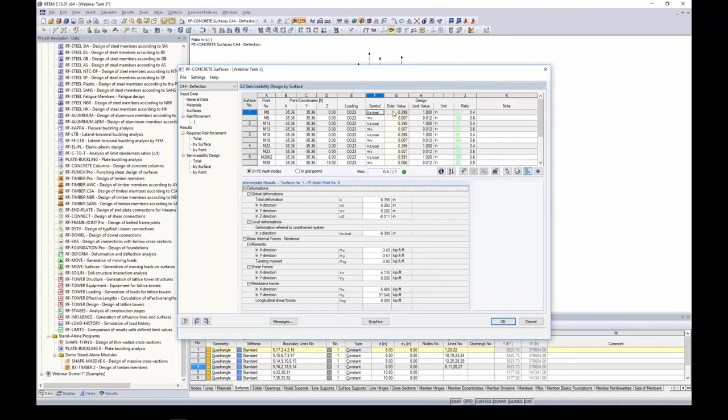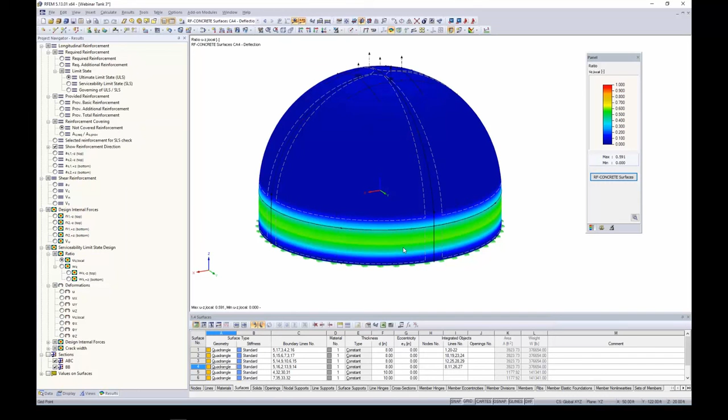So for the last time today, jumping to my saved results, I want to take a look at my RF-CONCRETE Surfaces module. The only difference we're going to see here is under serviceability design. We no longer just have the crack width considerations, but here is my deflection checks. My existing values are listed for each surface, and again, I can take a look at exactly where these fall within the structure in the background, if I pull this down a little bit, as well as the limiting design values. Remember, we just set this to 1 inch, and ultimately we get a deflection ratio. We can view all of this graphically as well under the serviceability. Now we have the option to view the deflection ratios back in RFEM. So that's really all that I wanted to touch on in regards to deflection as well.

Okay, so going back to the PowerPoint, that essentially wraps up our webinar for today. Now, I know that was a lot of information, as it always is, for the last hour.